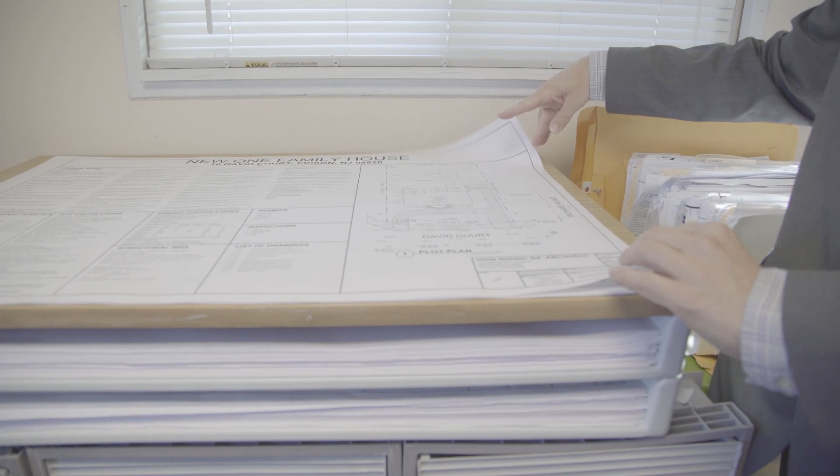Here, listen, this is the job, 10 David Court that we're going to go into the field and take a look at today. This is the set of drawings, 10 drawings, for a brand new house. This shows the plot plan.

And on here we have the general notes, building characteristics, site calculations, the energy calculations, structure requirements. We have the permits, inspections, and list of drawings.

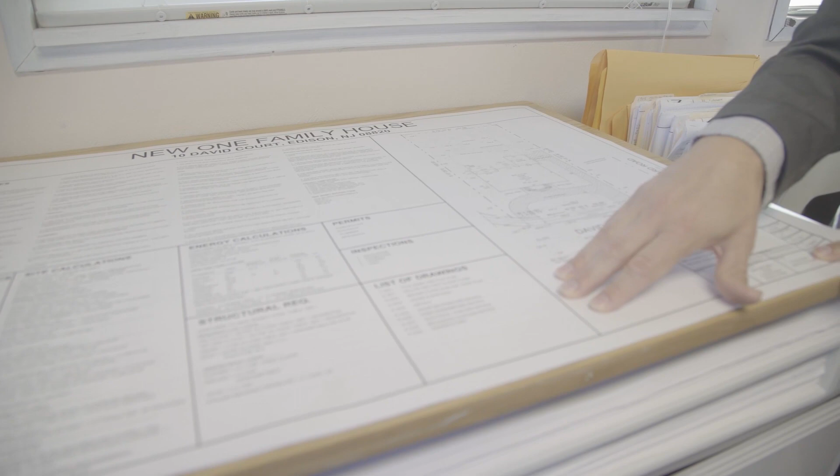And this, of course, is the basic information for the job on the title block, showing my office name, showing the project title. Of course, I have my project number here, who drew the drawings, the scale, the date of the job, and the drawing numbers. This is standard on every project, and of course my seal and signature for New Jersey.

So this here is going to show each sheet of drawings, showing the cellar plan, the first floor plan, and we go through with the title block. And we have here the next floor, the second floor with the roof.

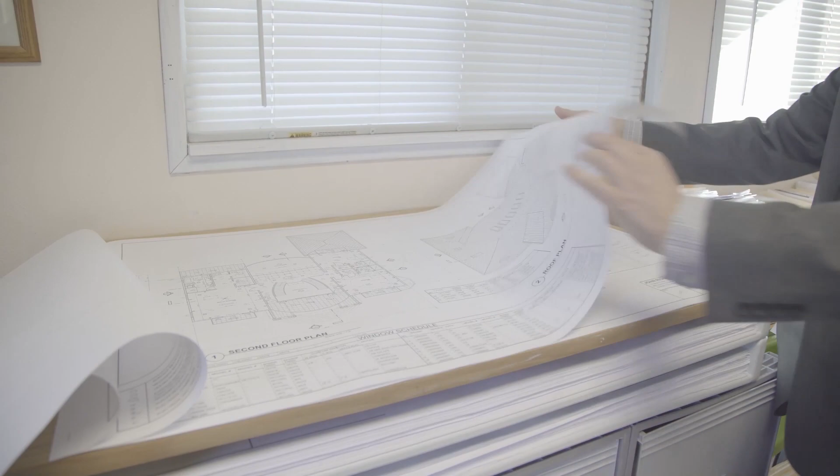Let's head over to show some elevations. This is the proposed house before construction. It's a 5,000 square foot house, brand new, with new superior walls for the foundations.

And we show here the required details to construct the house, including some house sections, some details. Then we have a riser diagram, so you have a plumbing diagram, water, gas risers. And of course, we have our basic electrical panel with wiring.

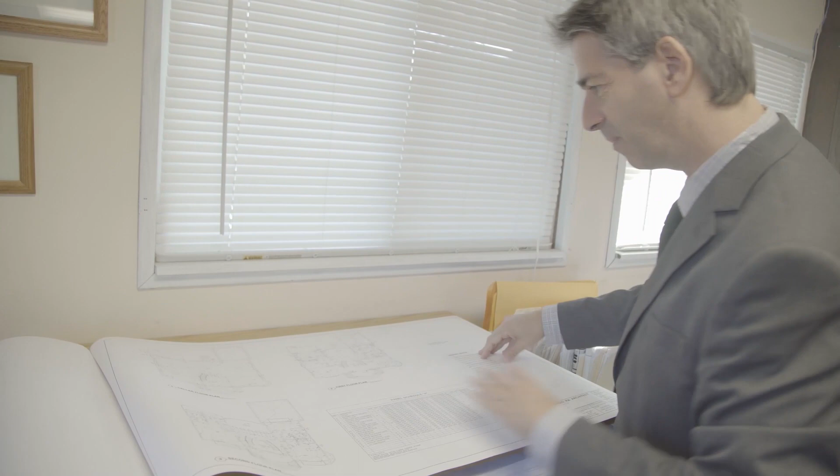Then we have our mechanical, which is for the heating and cooling system on the house. So this is showing the air diffusers and things like that.

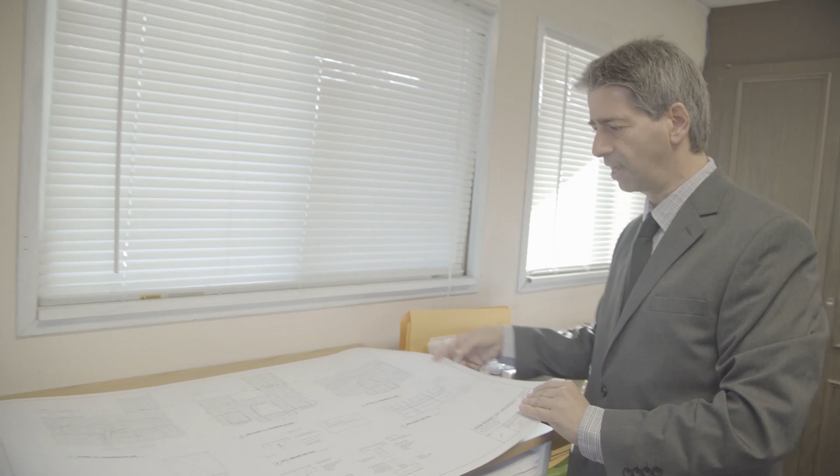And this is the structural framing for the new wood framing. We're using I-joists on this project because a lot of spans are very long on here, so we're using the newest and best technology for the floor.

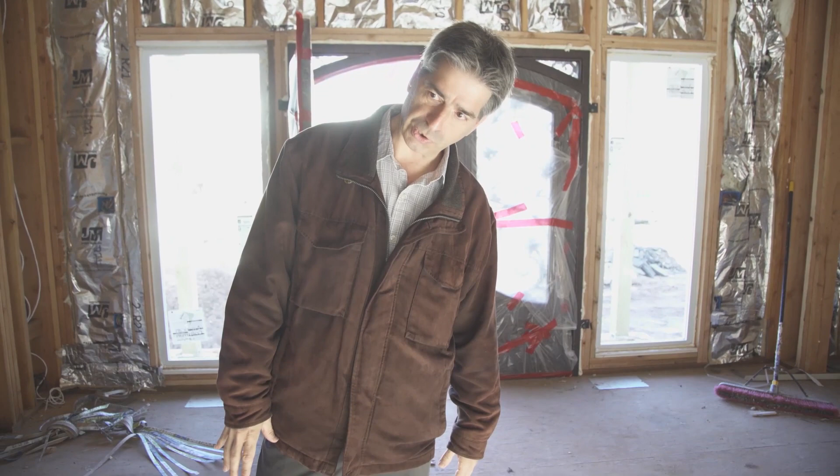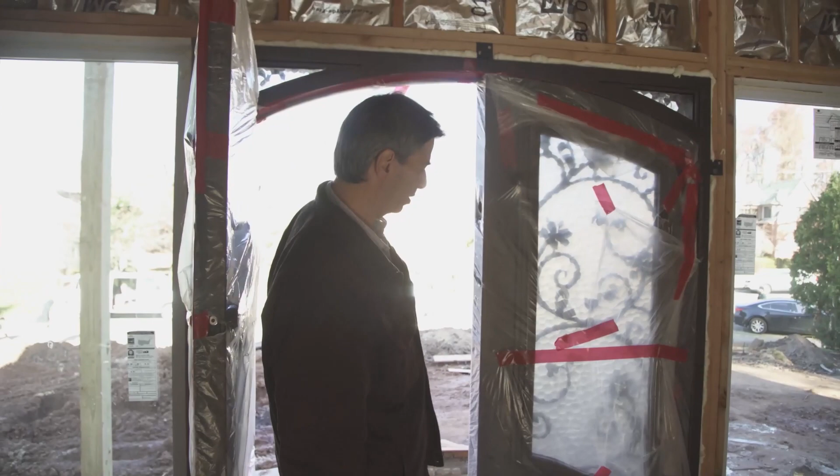Now this is the front entrance with a door. It's like an iron door, and it's very nicely detailed. So this here, as we enter in, this is the front entrance, a full double height entrance.

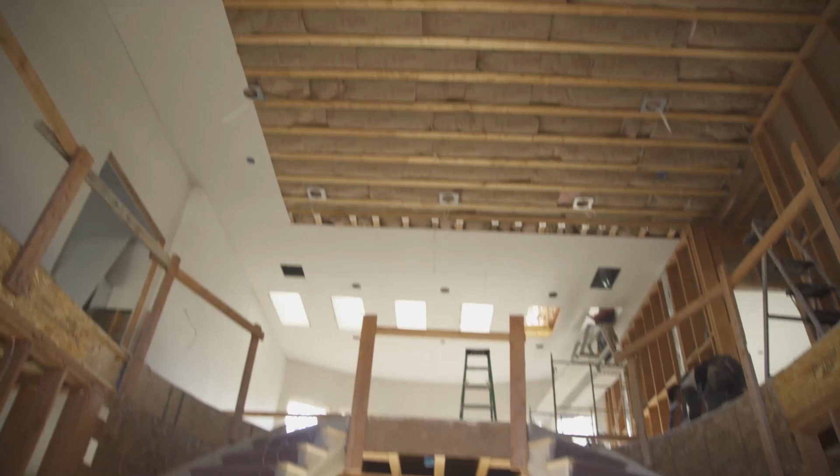And then you see we have the different spaces here. This is the entertainment room. The media room is going to be on the right side. We'll install some special equipment that's going to go on the ceiling.

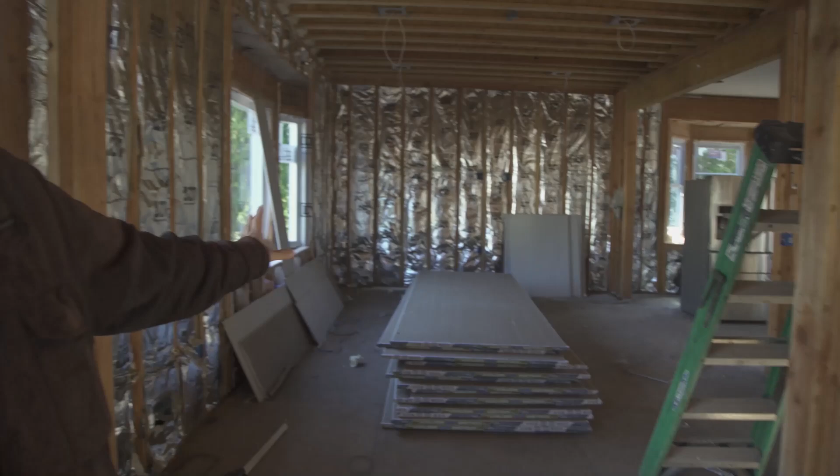Then this here is the traditional living room. This is the formal living room, and it walks over to the dining area and then to the kitchen.

And this here, as we enter in here, we're going to walk through and we're going to enter into a family room, which has a large double height space with curved walls. And I think we can probably just walk right in the middle here.

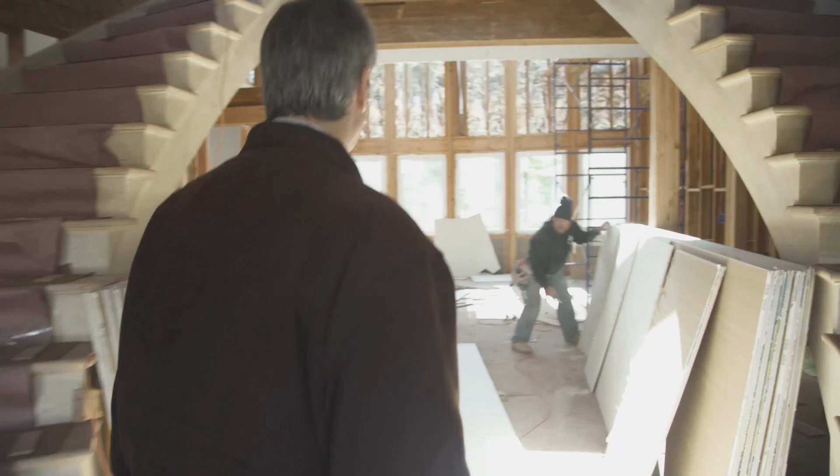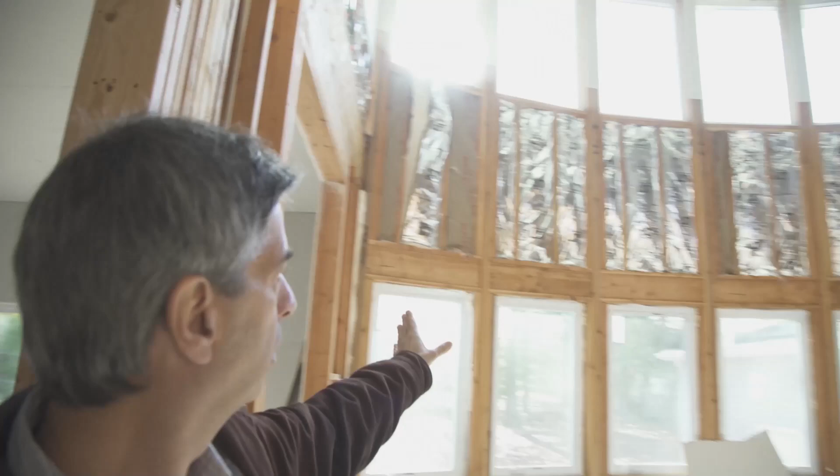So I think from here you can see the curved wall, and you have the windows, the vertical windows here. Everything is insulated, and it goes up and there's skylights above. There's a whole line of skylights.

With an overhanging balcony. It's a large room. This is their everyday family room, gathering area. Now over here is the kitchen.

Open window, you can look into the kitchen area. And we have these special doors, a set of special doors that get completely open up in the summertime, and we're going to have the deck inside. You can walk out to the deck.

This is the outside kitchen over in here with the breakfast area. And then in this room is the formal dining.

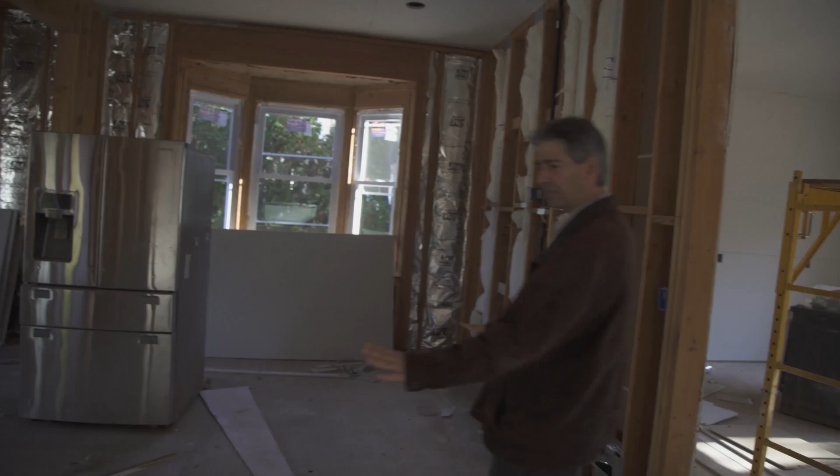Now right next to the formal dining area is really their prayer room. This is their prayer room area. This is the formal dining room with the bay window facing this side of the house.

I think you can just notice some things, notice the large structure, the 2x6 walls. We have glulam beams and I-joists in the ceiling. So everything is really with the best materials, the highest technology on the materials.

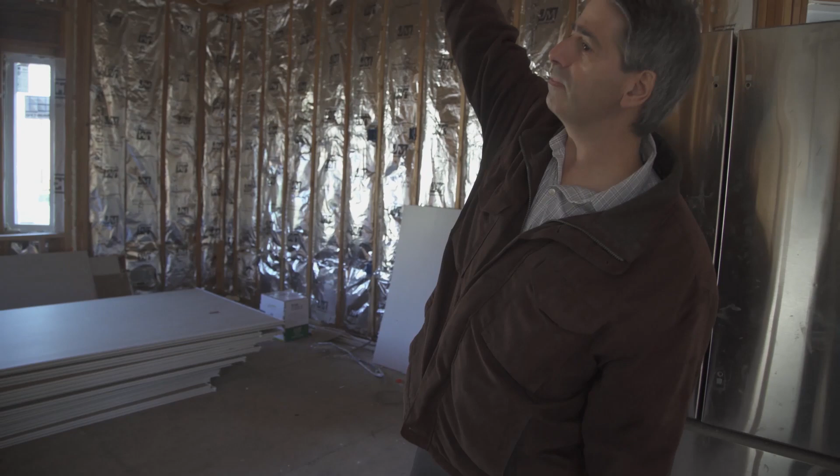And this is showing those I-joists going across here. You have the glulam beams, and this is a thicker 2x6 wall, a very high ceiling.

So I think from here we could head over just to take a look at the mudroom and the extra bedroom. It's just one last piece on the floor.

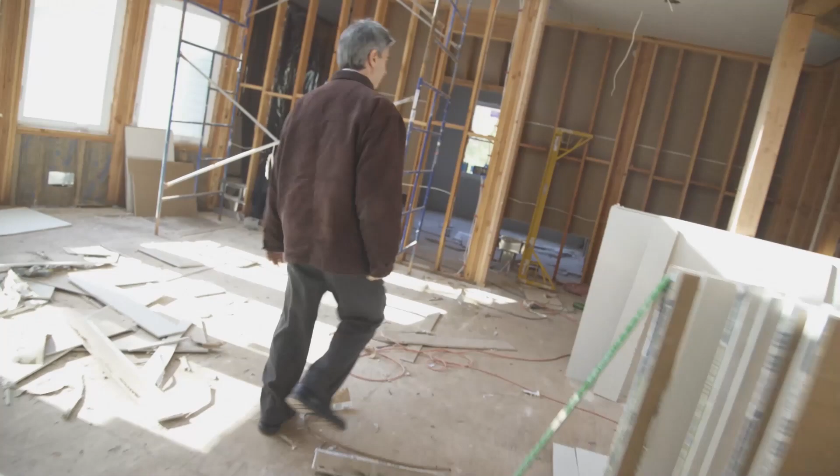That was the media room in here. And then here is the extra bedroom. This is like the guest bedroom, which has its own bath.

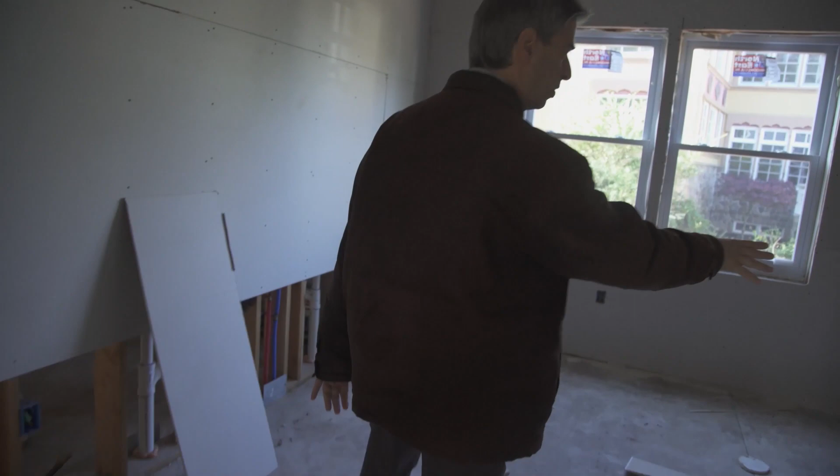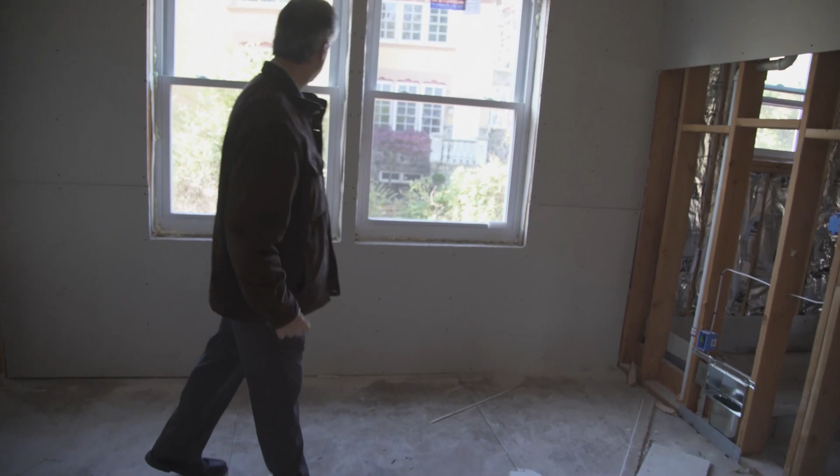It's showing here the shower pan. And then over here has a walk-in closet, so they have their own walk-in closet, and this is their bedroom, with the double window over here, large emergency escape windows. We have the central air coming through.

And then here, just to finish off this part of the house, this is the mudroom. So you enter from the garage, you park your car, you have your mudroom, you have your toilet room over here. And from here, we're going to walk upstairs to the second floor.

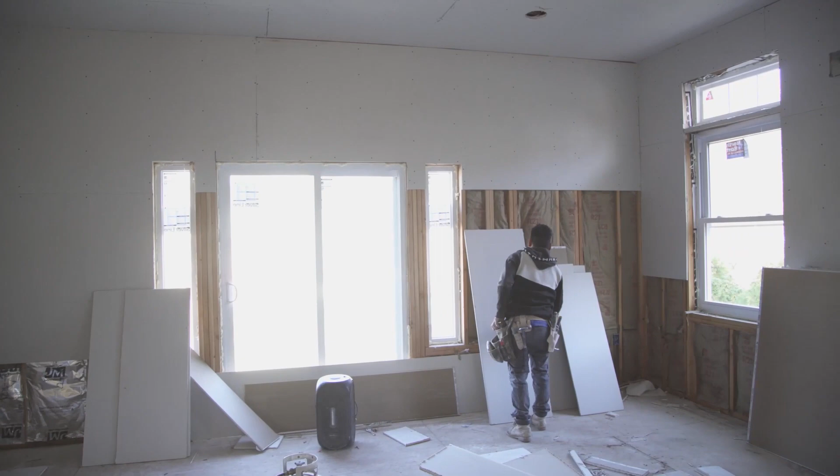So the master bedroom is comprised of the whole left side of the house. We have here the main room, sliding glass doors with sidelight windows, and it goes on to the balcony on this side. You can see the room is very large, 2 windows, which is where the bed would go in the middle. We have here the recessed lighting detail, skylight over here.

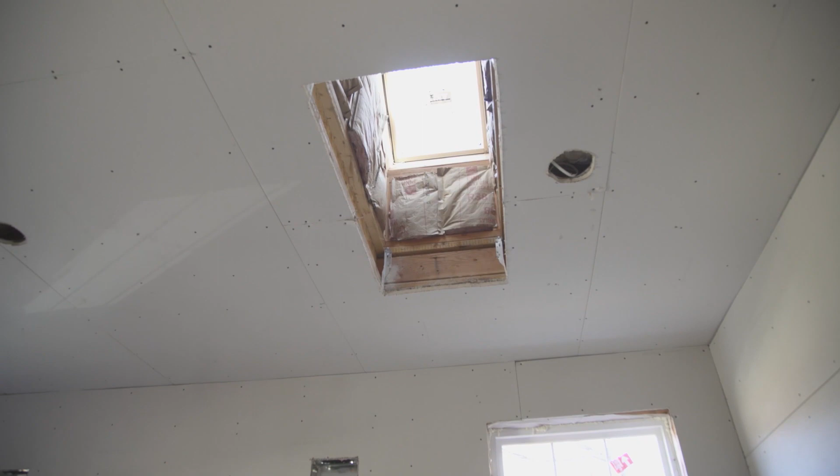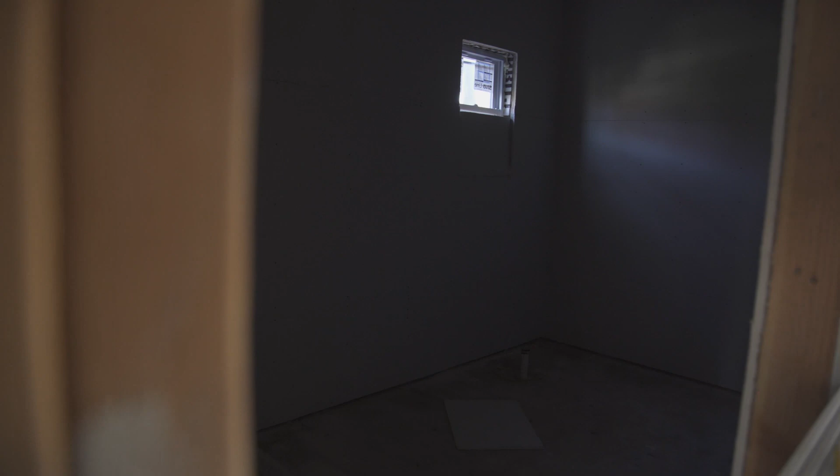And from here, you would then walk into the large areas of the master bath, which would have the pan shower, whirlpool, 2 lavatories, and a toilet area.

And this here we have 2 walk-in closets. So from here we also have a hall where you walk down and you could walk into the balcony area.

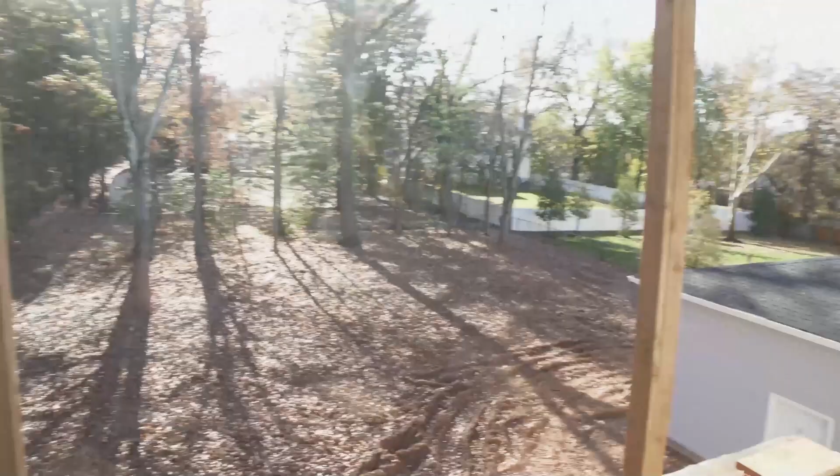And from the balcony area, you could then walk out and see the rear yard. This whole rear yard was completely cleaned up also during the construction of this house. It is now completely leveled, regraded, so there is no water problem. Water drainage is working very good.

I think from here you could also look over, you see the 2-car garage and the curve of this family room. See the curve of the family room over here.

And this is the terrace that is really over the breakfast room downstairs. So from here, from the bedroom, you can walk out and sit on the terrace. It's a very nice space. It's covered, it has a roof over it, so you're not out here in the rain. It's a nice experience.

Now from here, we'll head over, stop off at the front balcony, and head over to the kids' rooms on the other side of the house.

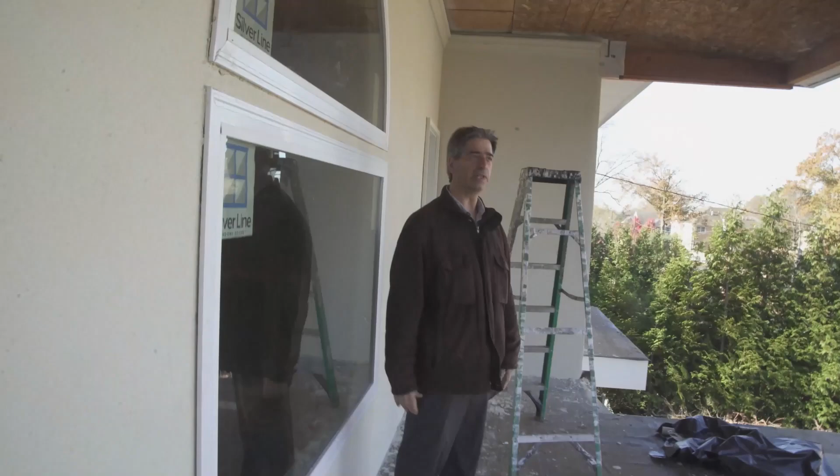This here is the front entrance. This is the balcony over the front entrance. It has the columns in the front, and we have a whole covered overhang, looking out over the front yard of the entrance.

We can see the balconies to the side. We have another door on this side, so you could sit here, you can walk around, go around the front entrance. And this is the window that's looking into the lobby, and you see it has a nice curve here.

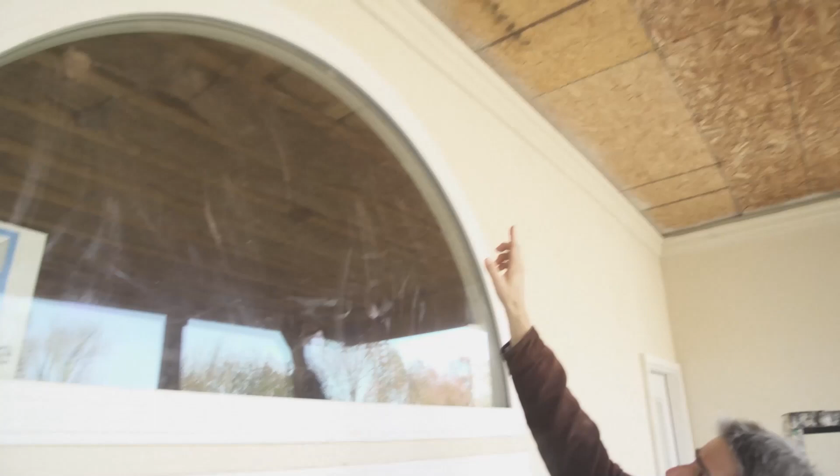Okay, so from the entrance, this side, the right side of the house, is the kids' room. This is the children's room.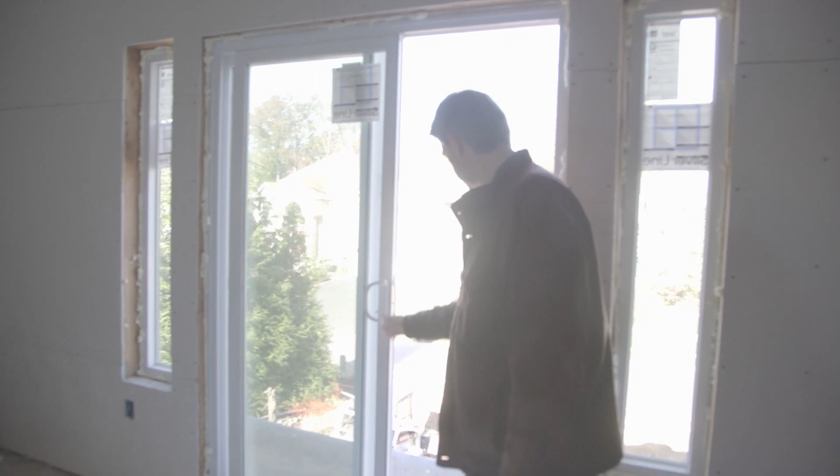Okay, so from here we're going to the front part of the house. We have the same idea on this side: a balcony, with some skylight windows, and the basic bedroom here. It's a nice sized room, with a window over here. And from here, this room has its own bathroom.

So this is going to have a hand shower, toilet, lavatory, and over here we're going to have a walk-in closet and some nice detailing in the ceiling with the lighting, skylight in the room too, and central air and heating.

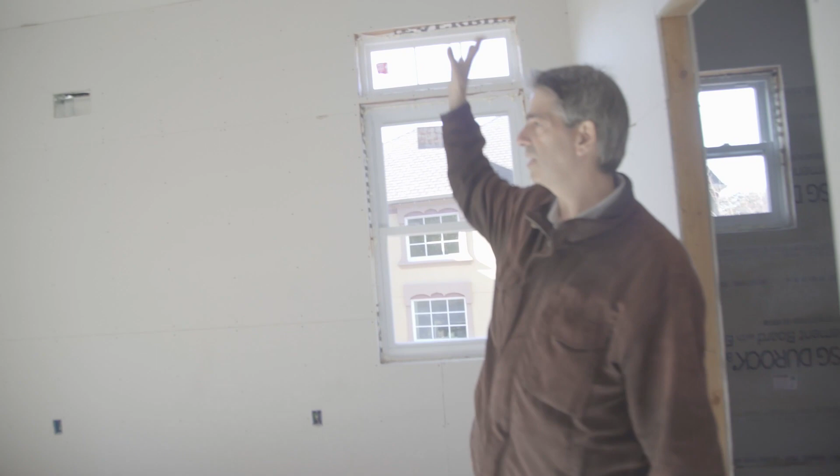So from this side, we head across to the other bedroom, and on this side we have the same idea where we have the bedroom, skylight, the balcony with a sliding door, window, and the same thing with the bathroom and closet. So that finishes out the second floor in the structure.

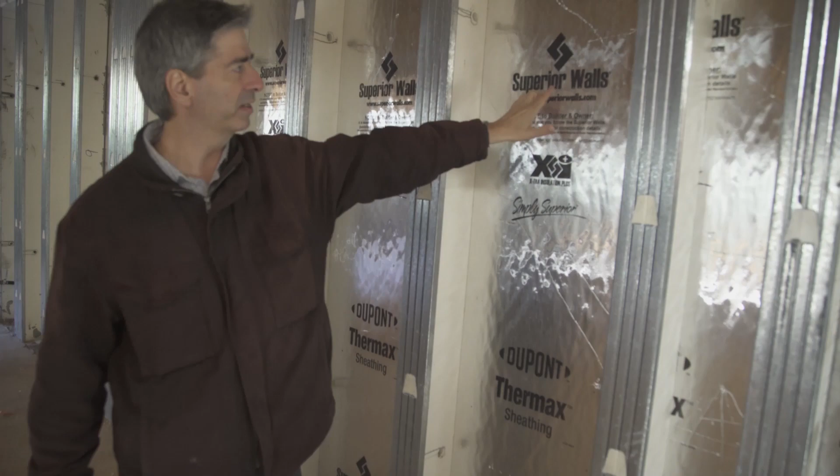So I think there's a few things about this house that we wanted to take a look at. One of them is the superior wall foundation. You can see here that this is a sandwich of metal, with concrete on the outside, the metal pieces inside, and foam. And it says right here, superior walls, extra insulation plus. So this is the foundation that was put in.

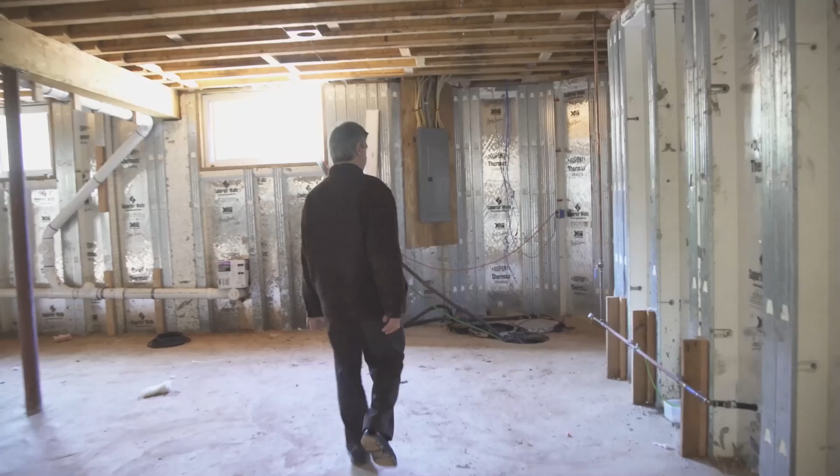They had these made in pieces at a factory, and they came here and pieced them together with a crane. That's how this new foundation system works, and on top of that a slab is put on. This is how the new foundations are made. I think this one piece of the foundation was really this corner piece - they were able to put it in different pieces of angles for the corner detail.

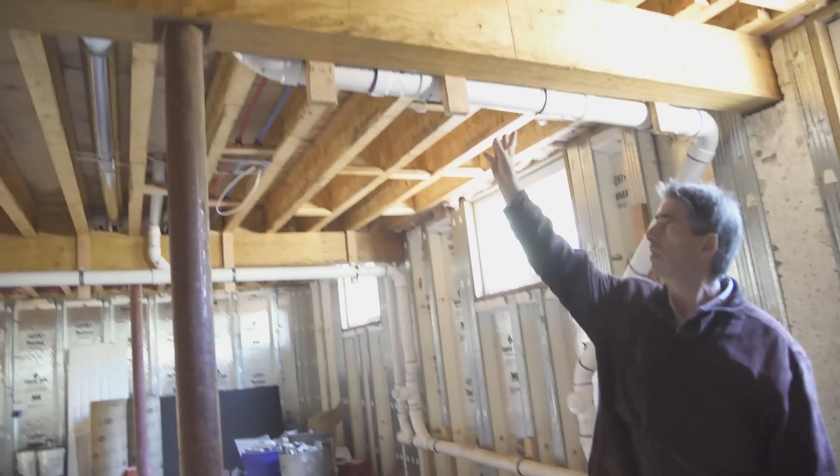And then here the rest of it is basic wood framing, where we have a base plate, we have the I-joists for the floor. And I think there are some particular things about this house. You see we have very large linear beams with columns, and this is a very large house. It spans across, and we have 2 lines of columns on this house.

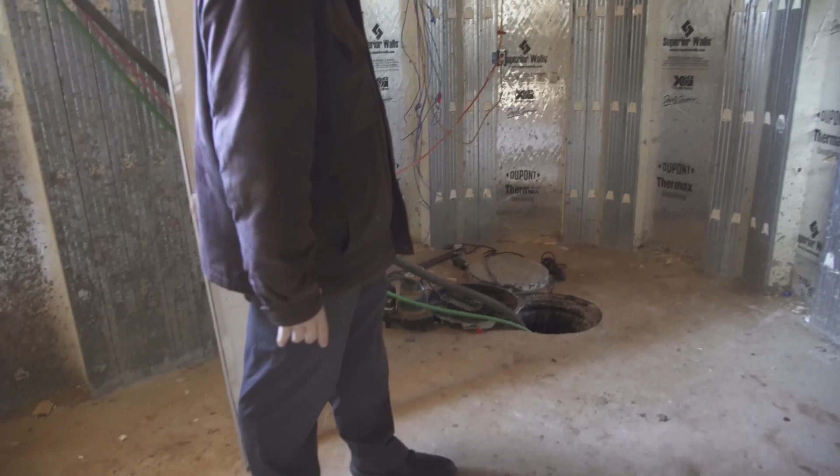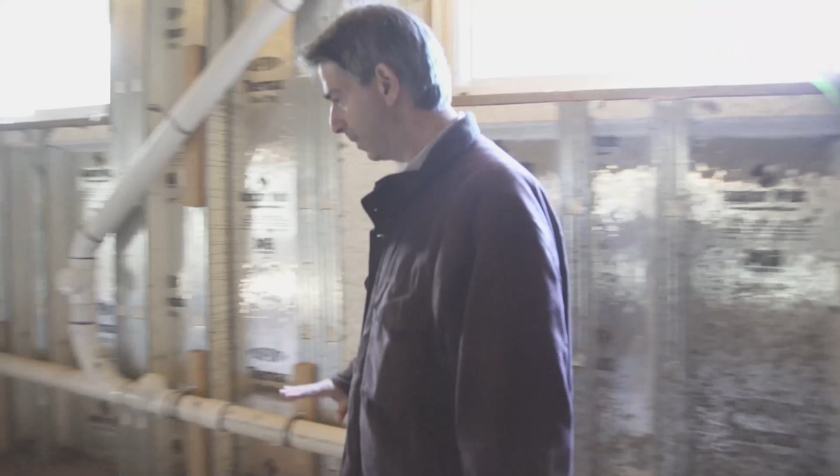And with that, we have all the different systems in here, the mechanical system, the piping system. One thing particular to this area is we also have a water drainage system, with piping coming around the whole perimeter with gravel. It's going into a sump pump and then heading out into the street. That's one particular thing they have here. So this whole thing has a new system, with gravel underneath the foundation.

And I think from here it's this very large open space. This is around the stair details, and you can see this whole beam coming right across the house.

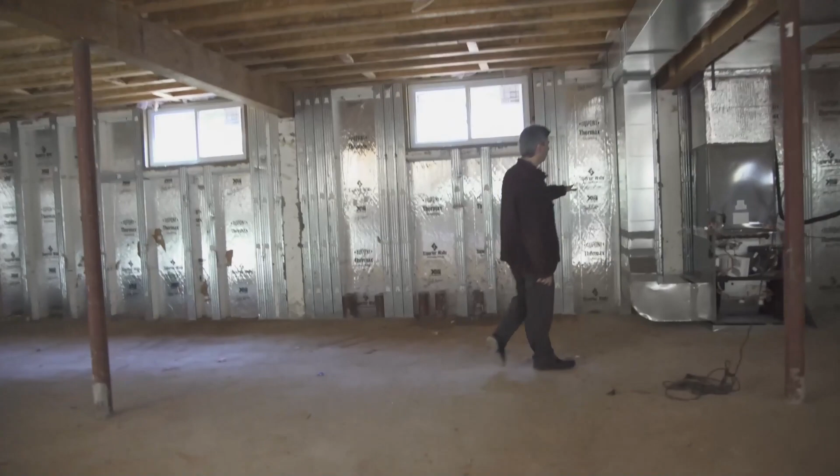This is the mechanical system, and this is all high efficiency units. We have a high efficiency HVAC system, high efficiency hot water heater. They no longer need a chimney, they're just going to have a PVC going right out the house. I think you can see the PVC pictured right there.

And this has some extra large windows for the cellar. It's a full height cellar. And from here we can also see the detail in the back.

This is the foundation that is below the family room with the curved wall. This is done with the Superior Walls - they were able to make the curved wall without a problem.

And then from here we have an exit stair that goes to the rear yard. Same thing, the walls here are made from Superior Walls put in place, and the stair goes to the outside. So this is really the cellar floor - it's a large open space, and it came out really good.

Okay, so now we're in the backyard of the house at 10 David Court in Edison, New Jersey. And from here, we're going to take a look at the curved wall, the family room, and some of the other building elements that are getting finished at this time.

And also where I'm standing here, the whole yard was completely regraded. They originally had a big sloping, uneven yard, and the whole yard has completely been regraded, solving all the water issues. Now the foundation is located higher than where the property line originally was. So now all the grading issues are solved, water problems are solved.

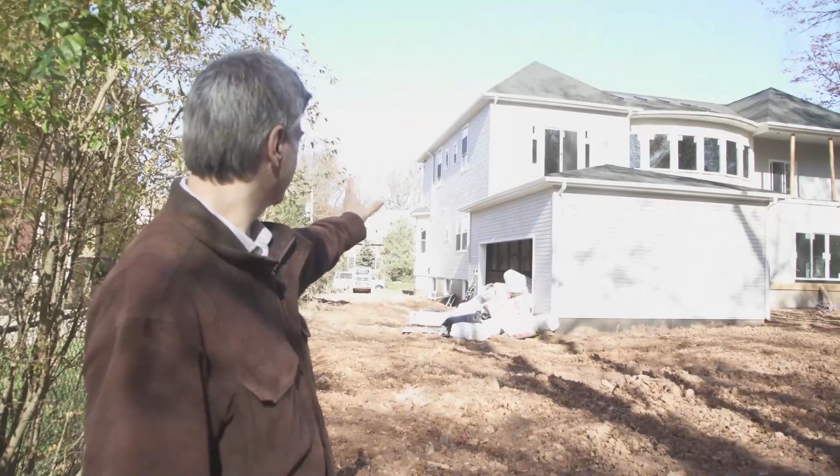And this is the 2-car garage that we were entering into the house before, attached to the house with the interior door. And then you can see the driveway leading from the circular driveway in the front. Here's where you come back and park the cars, on the side of the house. This is the whole parking area.

And I think from here you could also see the nice leveled out yard that's completely been renovated. If you looked at the neighbor's property, you see how some of them are uneven yards - there is a slope for drainage, just it isn't as steep and uneven as before. So all the problems were solved over here.

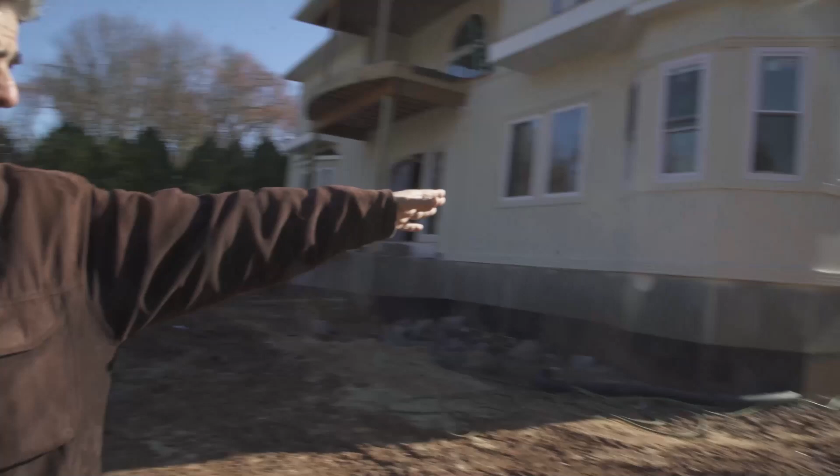So I think over here you can see the little offset of the garage, which gives it a nice look. Then we have the 3 symmetrical windows down there, and the basic windows for the other rooms. Then we have this little detail here where we have the meeting and media room in the entrance.